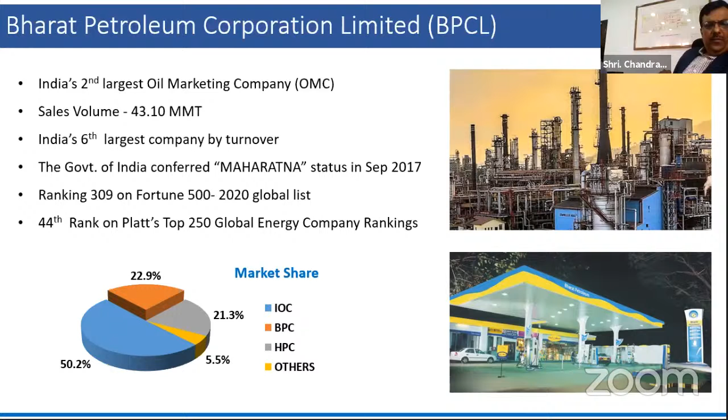Coming to Bharat Petroleum, we are a Maharatna company. We are the second largest oil marketing company, and we are ranked in the Fortune Global list. And you name any award, BPCL has got the award. We share about 22.9% of the market share.

BPCL operates 4 refineries in the country today: Kochi Refinery, the Mumbai Refinery, the Bharat Oman Refineries Limited in Bina, Madhya Pradesh, and the Numaligarh Refinery Limited in Assam. And all the 4 refineries of BPCL are compliant with the Bharat 6 stage standards. And the total refinery capacity of the group is about 38.3 million metric tons. And we have enough pipelines to take our products from the refineries to reach the end customer.

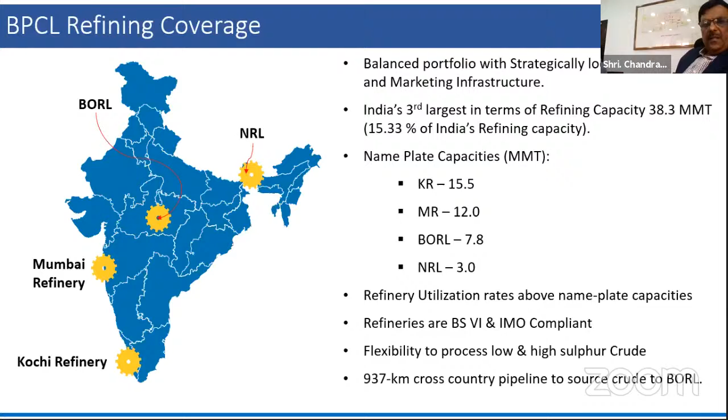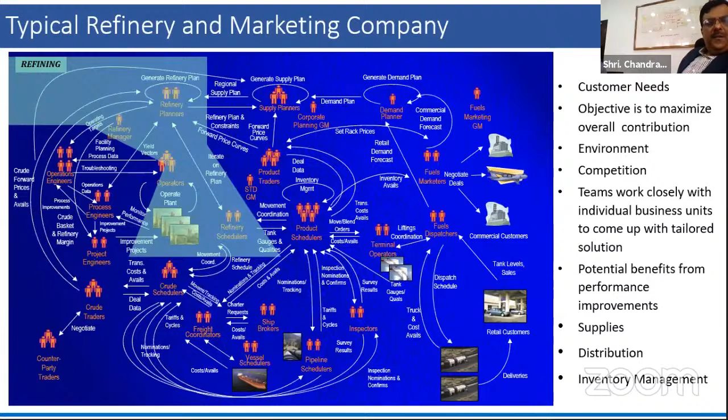So basically, the previous slide is divided into the following 6 segments. First is the crude oil supply, where we have a very clear-cut crude oil selection purchasing policy, and we bring crude oil from almost the entire part of the globe. You name any country, we have purchased crude from that country.

We have the refineries operating at full capacities to ensure that these crudes are converted into value-added products on a continuous basis. And once the refinery produces the value-added products, they are very efficiently and effectively transported to the nook and corner of the country by a huge array of pipelines. We have barges, rail, road distribution system, and across the country, we have got a lot of depots where the products are again stored.

The secondary freight consists of trucks and even sometimes bullock carts, hand carts for transporting this fuel to the farthest corner of our country, including the Indo-China border at Kashmir and the Indo-China border at Assam. Wherever you see vehicles moving, you can be well assured that it is from the effective processing and the logistics of the entire oil companies operating in India. And you are aware that we have got presence in retail, petrol and diesel, LPG, aviation and lubes.

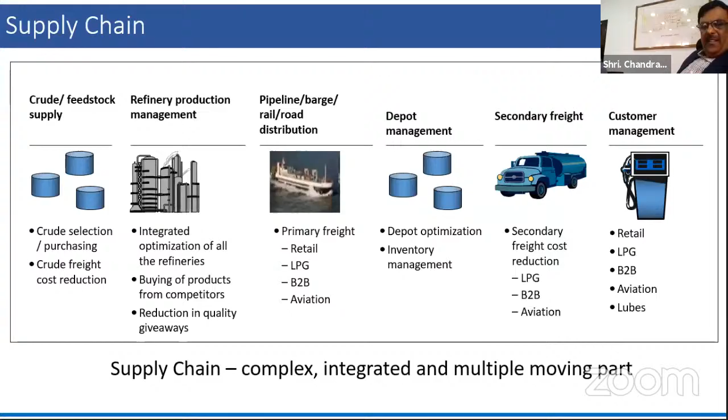So in the earlier times, the atmospheric residue was directly sold as fuel. But as the technology has improved, we are seeking value-added products from the atmospheric residue also. So we have something called a vacuum distillation, where the atmospheric residue is further distilled in vacuum. You are getting a product called vacuum gas oil. The vacuum gas oil is either catalytically cracked to have further lighter products like LPG, MS, and diesel, or it can be hydroprocessed in a hydrocracker to remove the sulfur to again produce value-added products, value-added chemicals.

So basically, it is the primary processing. Then you have the hydrotreating for diesel, kerosene, vacuum gas oil, and naphtha, and the value-added units. Value-added units are those units whose products we can directly sell in the market. Hydrotreating is very important now in the context of both the chemist and the chemical engineer. So here I would like to draw the attention of all the listeners who are MSc chemistry or chemistry professionals, that here is a stage where the chemist and the chemical engineer meet, because hydrotreating involves treating of the products by using hydrogen and catalyst in the presence of heat.

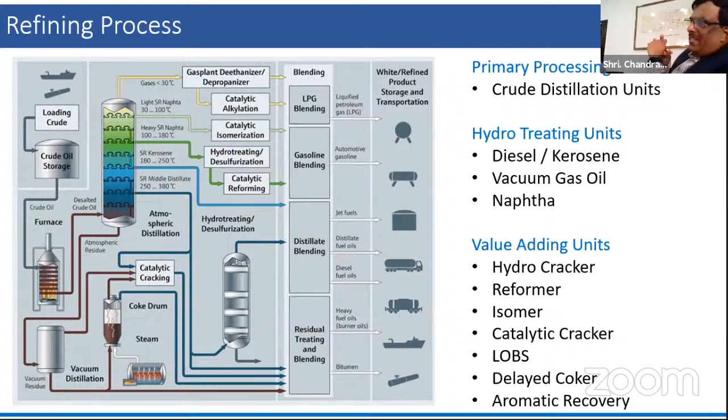So once this happens, the sulfur in the feed products is converted into hydrogen sulfide, and thereby the products coming out of the hydrotreater are kept at very low sulfur levels, probably at ppm levels. The hydrogen sulfide generated is absorbed in amine, released again, and converted back to sulfur. So that is how the process takes place. And in my later slides, I will be talking more about this hydrotreating and how we want the help of the chemists, the chemistry professionals who are more into the research side and analytical side, to help the oil industry achieve the aims and goals that are set.

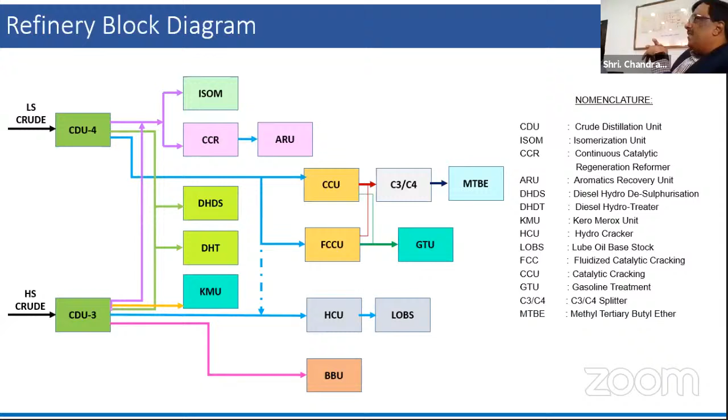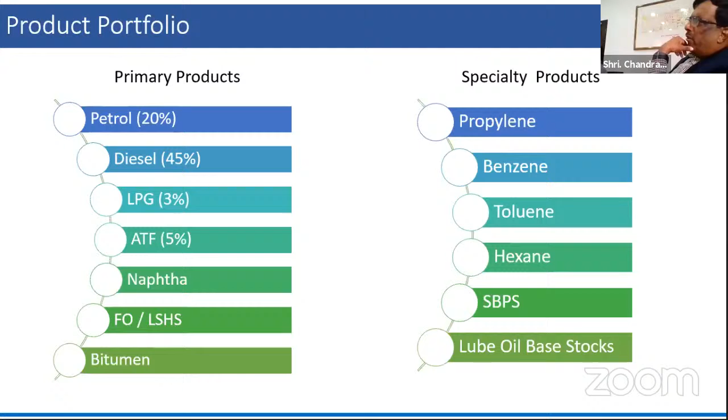So coming to the product profile of the refineries, this is a typical product profile, which is maybe common for all the refineries in the world. The LPG is only 3%, but you know the reach of this LPG. LPG is used as a cooking gas, and petrol and diesel are the commercially used fuels. The aviation turbine fuel is the fuel for aircraft. Naphtha, FO, LSHS are used as fuel, and bitumen is a very sought after product during the non-monsoon season for laying roads. And the Mumbai Refinery of BPCL also produces lube oil base stocks, which help the lube strategic business unit of BPCL to market MAK brand of lube oils.

The refinery is supported and governed by the following ISO standards: ISO 9000, ISO 14000, ISO 50000, 45000, and 17025. And all our labs are accredited to NABL, the National Accreditation Board for Testing and Calibration. So you can be well assured that any product that you buy in the market is certified by a lab which has NABL certification. The entire oil industry is governed by the Oil Industry Safety Directorate. This is sitting at Delhi, which coordinates with the Ministry of Petroleum and Natural Gas and other technical institutes around the world to set standards for safety across the oil industry.

Till now, the OISD has published more than 120 standards on various aspects of refinery safety. So OISD is the Bible of the Indian petroleum refinery. Then we also have the American Petroleum Institute standards, normally called API standards, which develop and promote safe, proven engineering practices. So all the refineries in the country today are following the OISD and API standards for all facets of operations, including commissioning, the layout of the various equipment and the design of various equipment.

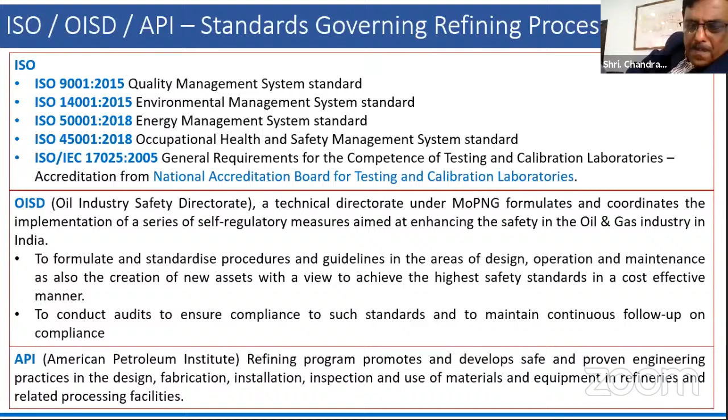Now, I think this is a subject that will be of interest to all my friends who are listening to this program. Where do we want the help of chemists, or where do we have the requirement of chemistry professionals to help us? I would like to tell one point very clearly here: the gap between chemical engineering, chemical technology, and chemistry is narrowing down day by day.

And in the future, I see in the next 5 years down the line that everything will become one major subject, which is predominantly governed by the fundamental concepts of chemistry that you have learned, along with certain engineering backgrounds that have been developed by the chemical engineering forefathers. I think these two are going to merge. This is what I feel, and this is likely to happen probably in the next 5 to 7 years.

So where we have a requirement, or where we seek your help, is that we require a lot of work to be done in catalysts and chemicals required for refinery processes. See, the catalysts are the basic workhorse of any refinery, any process industry, because catalysts are specifically designed for achieving a particular reaction in a particular way at a particular time without the catalyst undergoing a chemical change. This is what we have all learned as the catalyst.

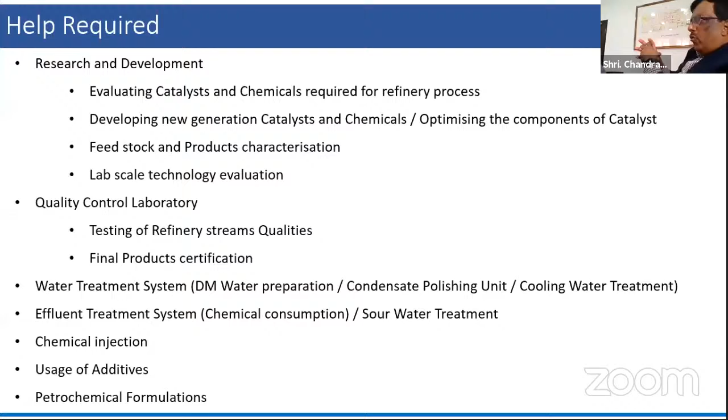Now, another area which I would like to introduce here is that at Kochi, BPCL is in the advanced stage of commissioning the propylene derivative petrochemical project. The unit is going to produce acrylic acid, oxo alcohol, and acrylates. And all these products are import substitute products, make in India products, which is going to save millions of rupees of foreign exchange for the government of India. So these products are now available. So how best you people can utilize these products for further downstream value-added products, you may please think about.

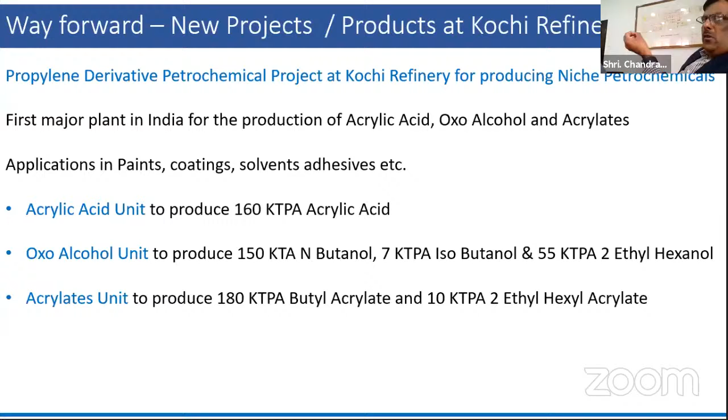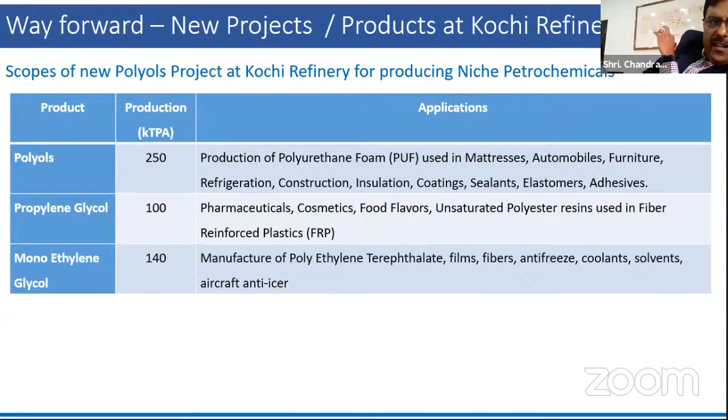And further to it, Kochi Refinery is going to have the polyols project, propylene glycol and monoethylene glycol. So this also I am leaving as food for thought. Please try to find out what more can be done with these value-added products. And at Mumbai Refinery, we are going to replicate what is happening at Kochi Refinery. So the future is not fuel. The future is going to be petrochemicals.

So the refineries operating, say, 15 years, 20 years down the line, you will find those refineries producing more petrochemicals than fuels. So more effective conversion of the streams which are currently being used for producing petrol and diesel will likely move towards petrochemicals. So this is the new mantra, and it is going to be a reality in probably a decade or two.

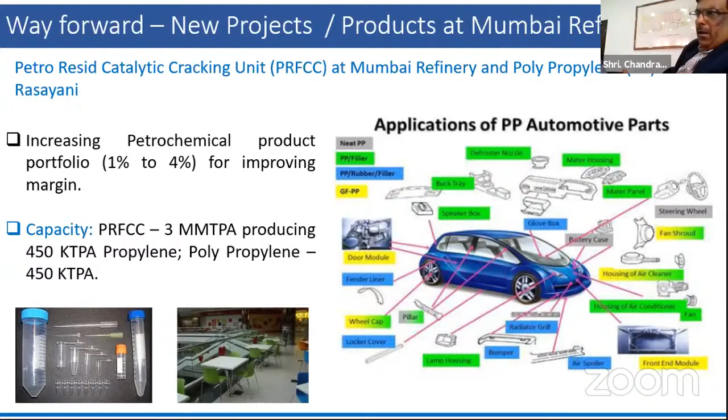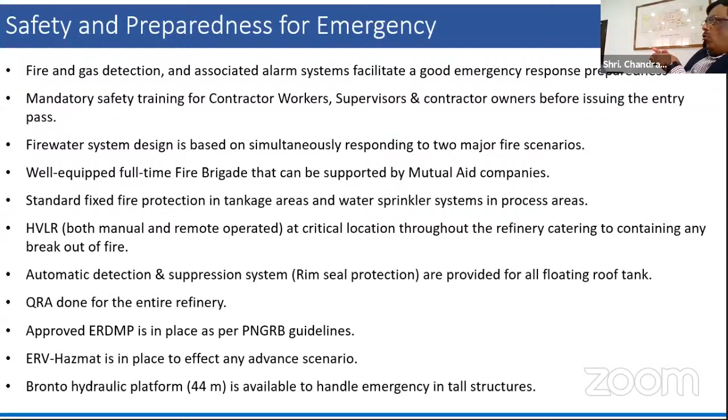Of course, this is a general slide with which I wanted to assure all my viewers that all the refineries in the country, including the BPCL group of refineries, have the best safety and best fire protection systems. The complete refinery is mapped by hydrocarbon monitors, with which we can detect any sort of small leaks anywhere in the refinery, and we can attack it and close it. And this slide is basically a self-explanatory slide. You can go through it at your leisure. If there are any doubts, you can contact me.

So what are the challenges for the refineries in the future? The high volatility of crude oil prices. COVID has taught us to operate in a very different regime altogether, but the crude oil prices are fluctuating so much, and in the international market, we are hardly getting a stable price. So this is continuously affecting our margins.

And as I told you, there is a reduction in demand in the growth of HSD and petrol, because first the EVs are coming in, and also, as I told you earlier, there are other fuels like hydrogen which are coming in for automotive fuels. So all these are going to bring down the consumption of diesel and petrol in the country. So in the future, the streams that are currently going to diesel and petrol will be converted to petrochemicals.

And also, we are having very stringent environmental norms now. The tighter the norms are, the costlier the process will become. And refineries have got no choice but to follow the latest guidelines on the environment, which BPCL as a group is always in the forefront of, ensuring that the refineries are operating within the parameters specified by the government. Operating cost is increasing because day by day the catalyst price and the chemical prices are going up.

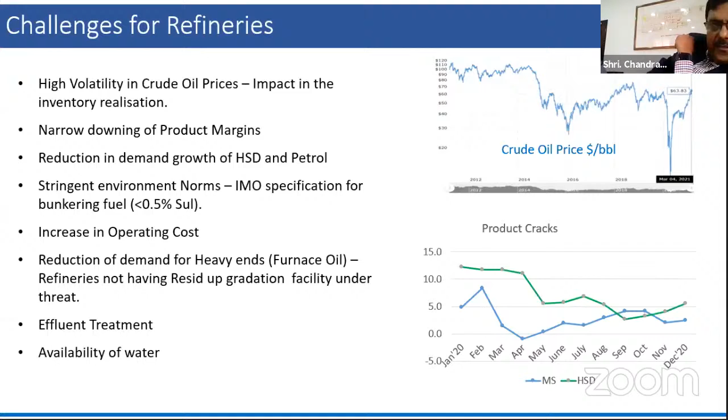This is where I have sought your help also. Heavy fuels demand is coming down, and effluent treatment and availability of water I have already talked about at length. So basically, this brings us to the end of my slides, end of my talk. And I'm prepared to take a few questions.

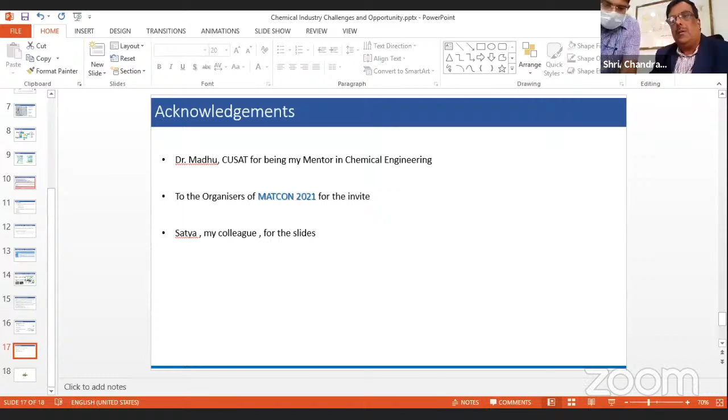Hello, Dr. Chandrasekhar. That was a wonderful talk. I have a very simple question. Yes, sir. Please go ahead. You are talking about desulfurization. I was just wondering what happens to this sulfur. How does it come out? Elemental sulfur or thiophene? Sir, if I have understood your question correctly, you wanted me to elaborate on the desulfurization process. Is it right, sir? Yeah, that's right.

Basically, I would like to draw your attention to the Bharat Stage norms fixed by the Government of India. About 15 years ago, the sulfur in diesel used to be as high as 2,500 ppm or even more. Today, the sulfur in diesel is less than 10 ppm, which means the refineries are geared up to produce diesel going from 2,500 ppm sulfur to less than 10 ppm sulfur. This is achieved by the desulfurization of the diesel.

Now, if you look at diesel per se in the petroleum crude assay, the sulfur has a number of species. It can be a thiophene, it can be normal sulfur, it can be aromatic-based sulfur. On the sulfur group itself, I could probably speak for one session. But to answer your question, this sulfur is dependent on the type of crude that we are processing. And the crudes are getting harder and harder, for which the complexity of the sulfur molecules is also increasing day by day. So it is now becoming a big challenge.